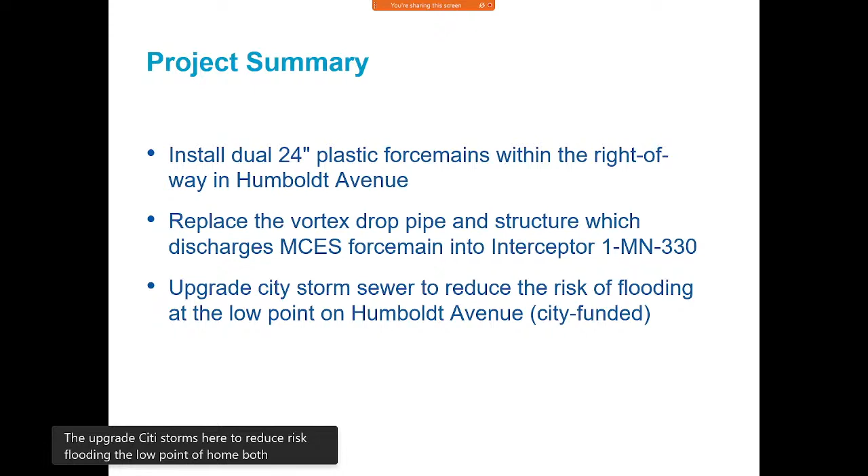The communication activities to date - we've done a fairly extensive communication plan. We had a virtual open house back on August 25th. We've met with major events in the area, the Uptown Art Fair and Uptown Farmers Market, which use the area where we're proposing to do some of the work. We've coordinated the work with them and they're on board with our plan. We met with the Minneapolis traffic department and the Hennepin County Regional Rail Authority for the Midtown Greenway crossings. We've got plans to accommodate the bike trail path and traffic without having to detour them.

We've got an extensive traffic control plan that has been reviewed by the traffic department. We've also updated Councilmember Goodman in Minneapolis on two occasions, and we plan to continue updating her fairly regularly. During the construction phase, we have a website, hotline, and project email that are all active currently. We've got what's called a Gov Delivery sign-up, where residents, city officials, or council members here at the council can periodically sign up to get updates on the project.

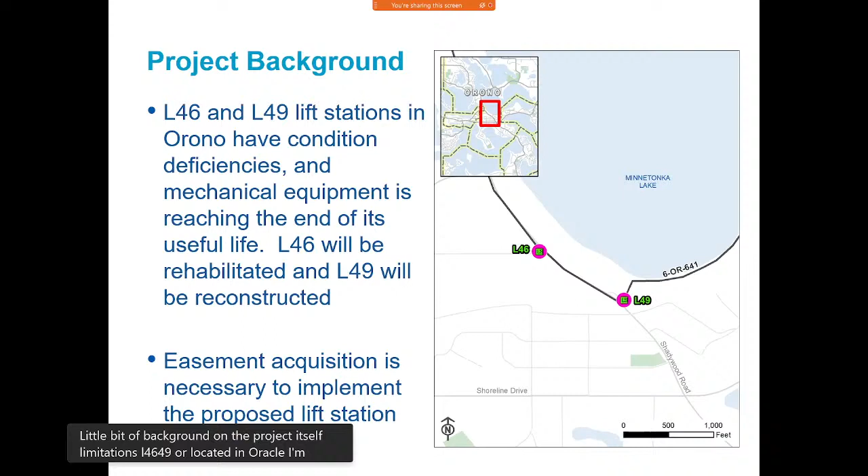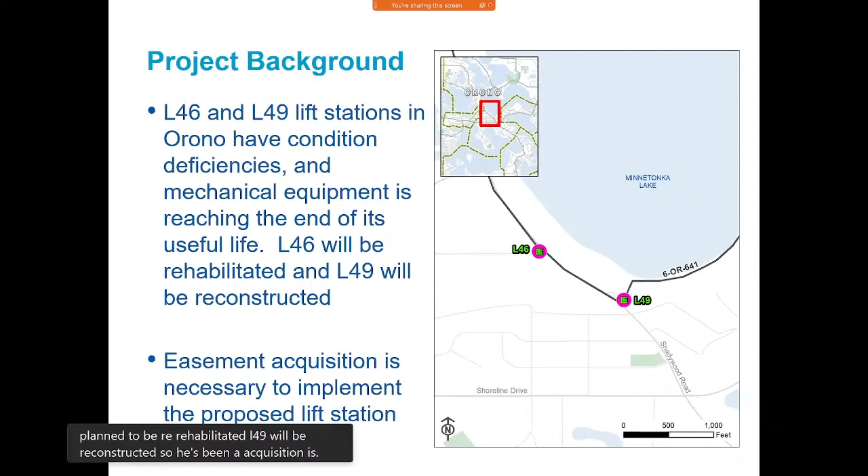A little background on the project. Lift stations L46 and L49 are located in Orono, on the south shore of Crystal Bay on Lake Minnetonka. These facilities have been identified as having condition deficiencies; the mechanical equipment is reaching the end of its useful life. L46 is planned to be rehabilitated, L49 will be reconstructed, so easement acquisition is necessary to implement the proposed lift station improvements for this project.

Next slide please. The work will require a temporary easement for construction on one parcel near L49. We'll also need site improvements near L46 that will require expansion of an existing permanent easement. Site improvements at L46 will include a driveway to accommodate maintenance vehicles, reducing the use of on-street parking which reduces visibility at an intersection with difficult sight lines. That's the main reason for the additional permanent easement needed for the area.

Next slide please. With that, our proposed action is that the Metropolitan Council adopts Resolution 19, authorizing the acquisition and condemnation of real property for the L46 and L49 lift station improvements, MCES project number 802831. Next slide please. And with that, I can stand for questions.

Any questions for Mr. Woodine? Pretty straightforward, and I think you're up on the next one too, but let's vote on this one. Roll call, or is there a motion first? A motion, Wolf moves approval. And a second? Vento seconds.

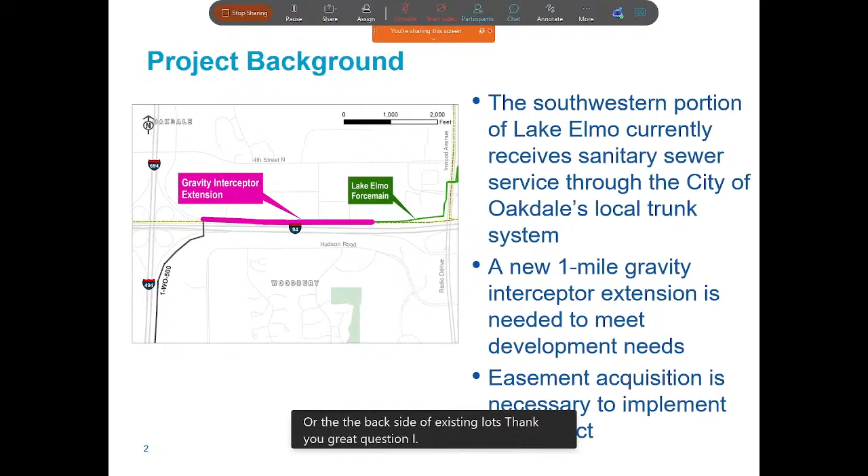Okay, we have a motion and a second. A roll call, please. If I could have that repeated, who motioned and seconded? Good question. It was Councilmember Vento that made the motion. I'm not sure we actually did get a second. Wolf was the second. Oh, Wolf. There we go. Yeah, excellent, Councilmember Wolf. Okay.

Roll call, please. Fredson? Aye. Sterner? Aye. Vento? Aye. Wolf? Aye. Zarin? Aye. And Lindstrom? Aye. Thank you.

All right. Thank you, everybody. A few items, just as information items. First two dealing with COVID, starting with an important first one about communication. Ms. McKinley.

Hi, everybody. This is Karen Neese. I'm going to introduce Deb in a second here, but good afternoon, Mr. Chair and council members. Good afternoon. Welcome. Thank you. Karen Neese, I'm Director of Administration and Communications for Environmental Services.

But I want to ask you to go back about a year. Let's go back to March of 2020, which seems so long ago. I just read an article that said it's the longest year, and it feels like that. On March 6th, that was the first case of COVID-19 confirmed in Minnesota.

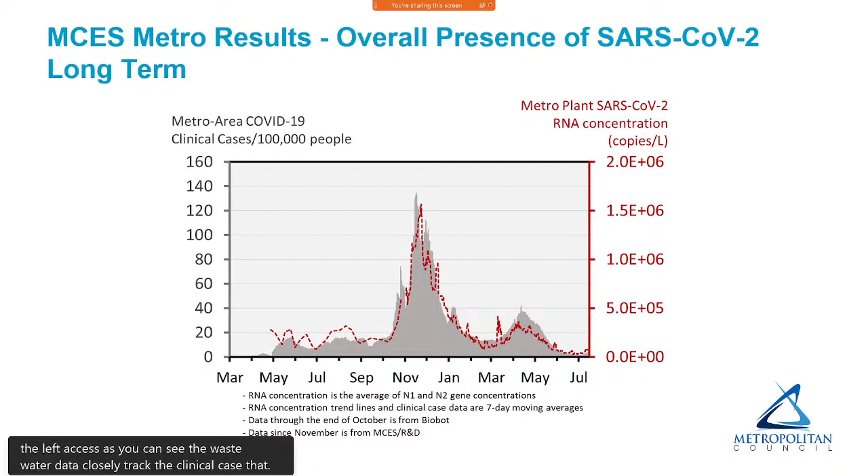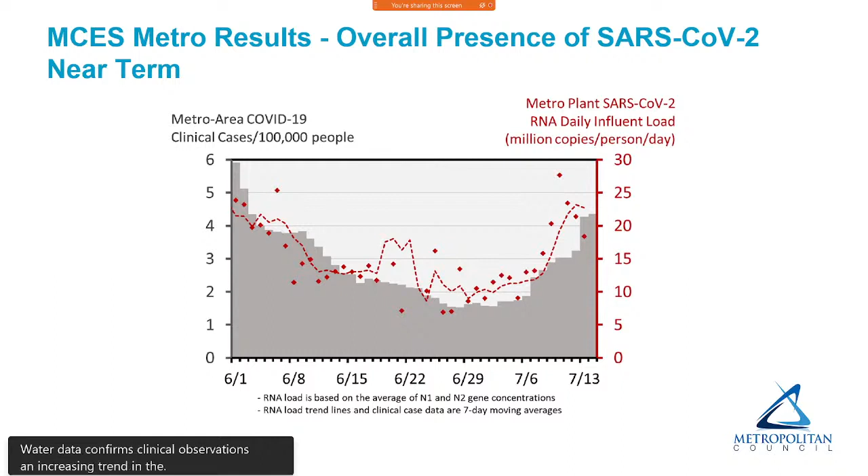Next slide, please. Currently, we are experiencing a surge in new clinical cases driven largely by the highly contagious Delta variant. This plot shows recent data for both the metro plant influent load and new clinical cases starting in June and running through July 14. As you can see, the wastewater data confirms clinical observations of an increasing trend in the presence of the virus in the metro plant service area.

Next slide, please. As George indicated earlier, a major new development since we spoke with you last is our initiation of variant monitoring in metro plant influent. Our targeted assay work has produced results demonstrating how a surge in the prevalence of the Alpha variant drove the higher viral loads we saw in metro plant influent back in April and May. The blue area in this plot represents the total SARS-CoV-2 load entering the plant over time, and the cream-colored area shows the Alpha variant load. You can see that the Alpha load went from 0 back in January.

Alpha accounted for up to 85% of the total load during and through the surge from March to June. We didn't have data in time to get it into this presentation, but I can report that the Alpha variant has now been almost wholly supplanted by the Delta variant, which now represents nearly 100% of the SARS-CoV-2 viral RNA we are seeing in metro influent.

The pandemic is not over, and we expect other new variants of concern will appear in our community in the future. Going forward, we will be in close communication with Department of Health staff on the selection of which variants to include in our targeted assay variant monitoring program, ensuring we are getting the most relevant data for public health decision making. Next slide, please.

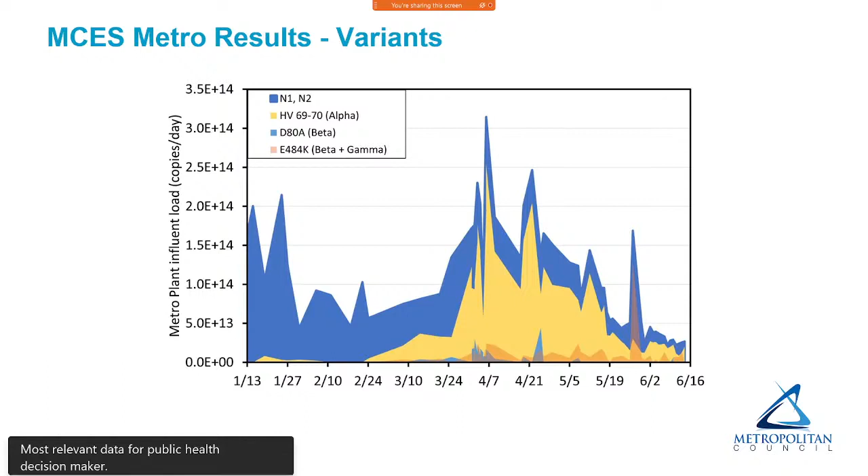Our future efforts will remain focused on monitoring the load of viral RNA and the prevalence of variants of concern in metro plant influent wastewater. We will coordinate closely with Department of Health staff on the variants we target and provide them with weekly updates of our results. Within the next month, we will complete our initial evaluation of the sequence capture technique and hope to begin producing additional sequence-specific information soon thereafter. We will continue our participation in state and national projects, providing pandemic surveillance and developing the potential of wastewater-based epidemiology for the protection of human health.

That completes our update. Thank you again for this opportunity and for your time. If there are any questions, we will be happy to address them.

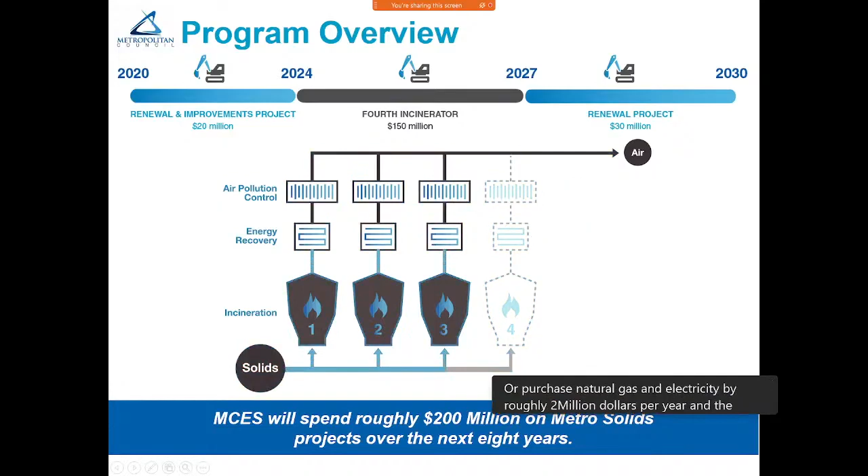Thanks, Janine. The 4th incinerator will be constructed upon the completion of the current smaller renewal project. MCES plans to construct a 4th parallel incineration train similar to our existing system with comparable energy recovery and air pollution control systems. The energy recovery system reduces our purchased natural gas and electricity by roughly $2 million per year, and the incineration process reduces 850 tons of wastewater solids down to 40 tons of inert ash.

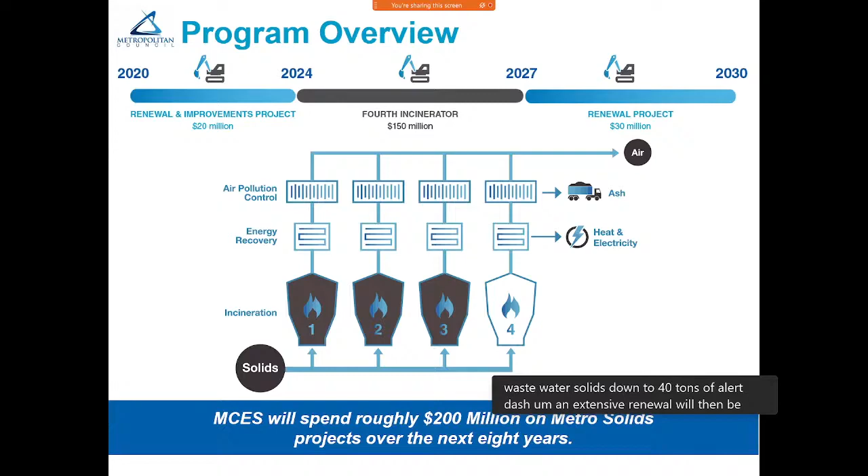An extensive renewal will then be completed on the existing 3 incinerators from 2027 to 2029. In the next 8 years, MCES will spend roughly $200 million on Metro Plant Solids projects. Next slide.

The planning for the project was completed when the council approved the facility plan in October of 2018. The project is currently in preliminary design, including permitting and environmental review.

The Metro Plant's air permit will be amended and, as Janine mentioned, a voluntary EAW will be completed. Both of these processes will be managed by the Minnesota Pollution Control Agency. As Janine mentioned, the construction of the fourth incinerator will occur from 2024 through 2026, and the delivery will be a fixed price design build.

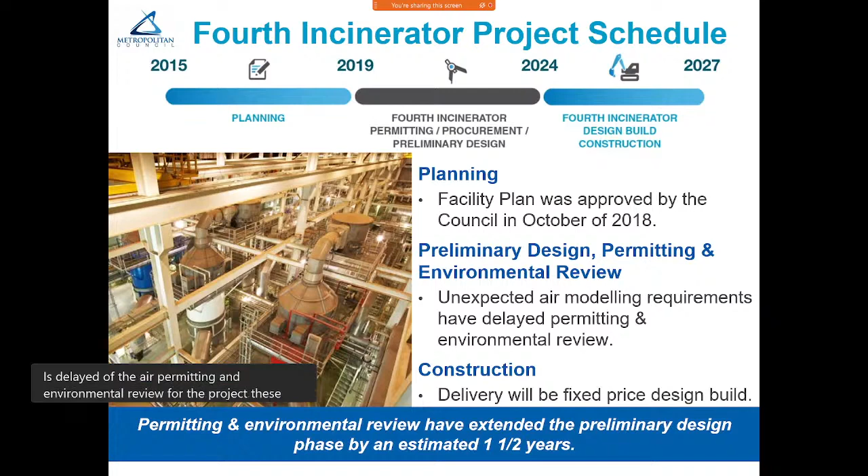The project has run into some unexpected computer modeling requirements due to where the metro plant is located, which has delayed the air permitting and environmental review for the project. These delays have extended the preliminary design phase by roughly 1.5 years from what was originally planned.

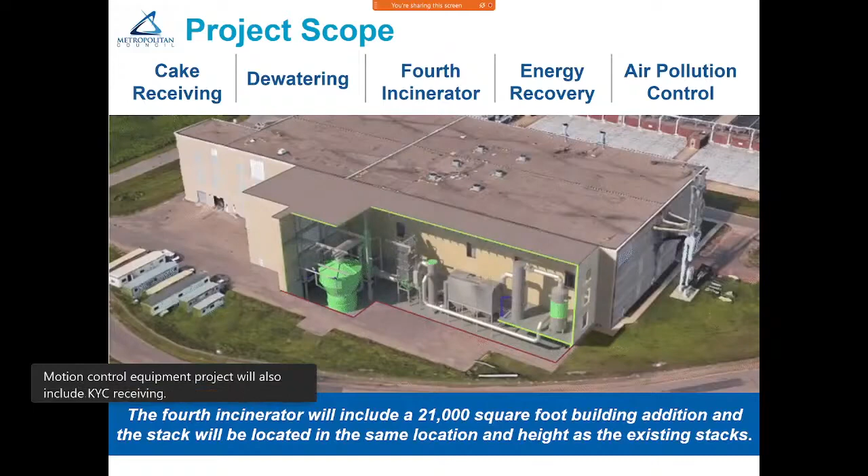The project will also include additional dewatering facilities, the fourth incinerator, energy recovery including a new steam turbine generator, and air pollution control equipment. The project will also include cake receiving facilities so that MCES can accept dewatered solids from other MCES wastewater treatment plants on an emergency backup basis.

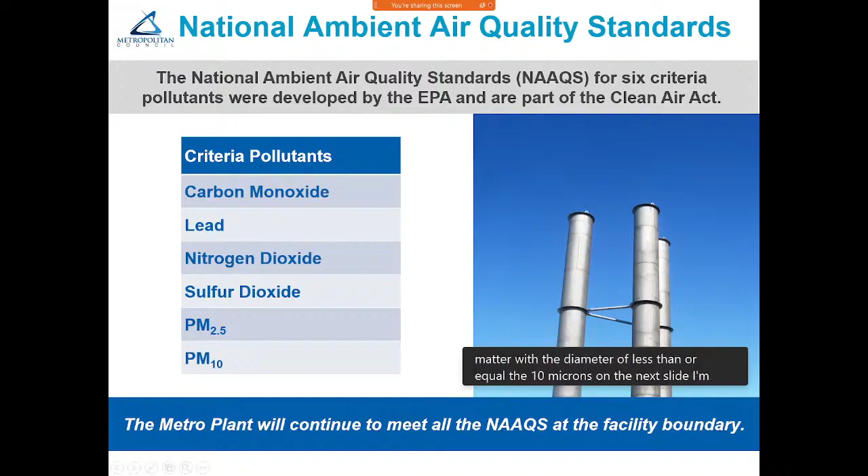PM2.5 is small airborne particulate matter, or material with a diameter less than 2.5 microns. PM10 is particulate matter with a diameter less than or equal to 10 microns. On the next slide, I'm going to talk a little bit more about the pollutant PM10.

The graphic on the left side of the slide shows a gradation of micron particle sizes from the smallest, a smoke particle at 1/2 micron, to the largest, a coffee ground at 400 microns. A PM10 particle is about the size of a particle of pollen. Breathing in large concentrations of PM10 can damage your lungs, and that's why there's an air quality standard in place for PM10.

In 1994, the blue area shown in the map on the right, surrounding the metro plant and other industries, was above the national ambient air quality standards for PM10. The area includes Childs Road and Red Rock Road. When an area exceeds a national ambient air quality standard for a particular pollutant, the MPCA identifies the area as non-attainment for that pollutant.

In response to non-attainment for PM10, the MPCA developed a state implementation plan, or SIP, which is a collection of regulations and requirements for the area to bring it back below the national ambient air quality standard. Emissions reductions successfully brought this area back into attainment in 2002, and MCES played a role in improving the air quality in the area by replacing multiple hearth incinerators at the Metro plant with fluid bed incinerators in 2005.

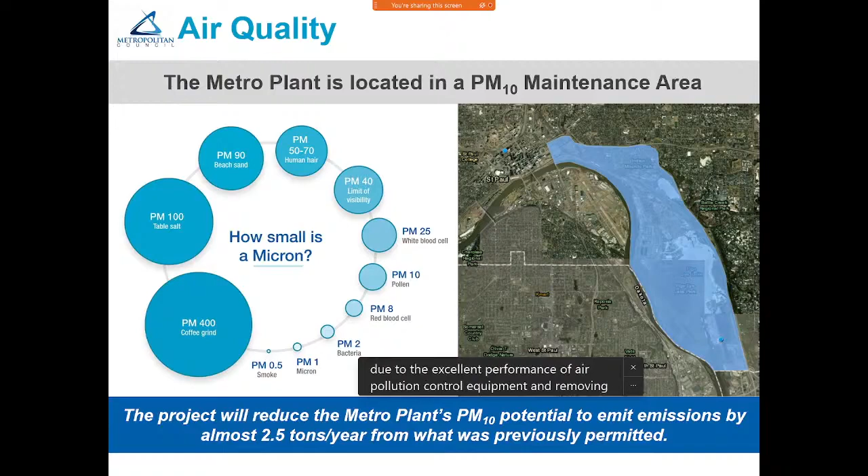That's because we didn't construct previously planned facilities for land application of sludge, and we were able to accept a low PM10 limit due to the excellent performance of air pollution control equipment in removing particulates from incinerator emissions.

The existing Metro Plant incinerators have an exceptional track record of environmental compliance, and we're very proud of their performance. The incinerators have performed so well that the emissions data from the Metro plant were used by the EPA in establishing new, more stringent standards for incinerators in 2010.

In 2010, the EPA set new emission standards for existing sewage sludge incinerators constructed before 2010, and even lower standards for new sludge incinerators constructed after 2010. These standards are based on treatment technology, and they're separate from the national ambient air quality standards I just presented. The existing incinerators at the Metro plant were constructed in 2005, so the standards for existing incinerators apply.

The graph here compares actual emissions data for the Metro plant incinerators, the dark blue columns, to the standards for new sewage sludge incinerators.

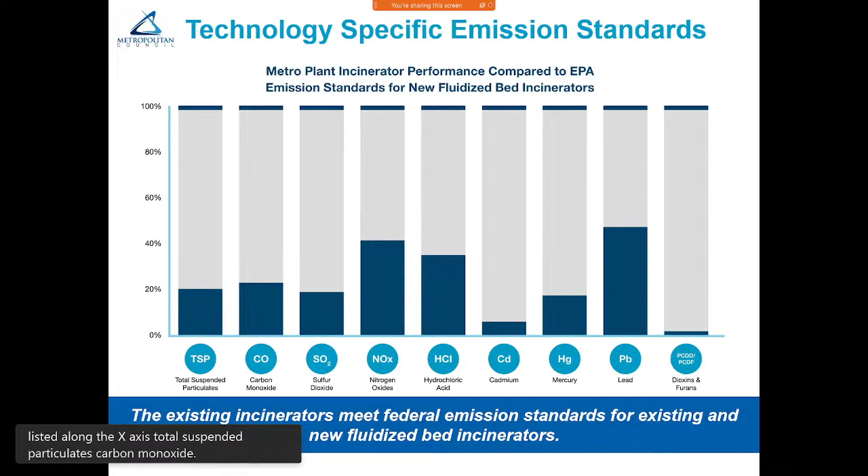These are the new incinerators, not the existing ones. The pollutants of concern are listed along the x-axis: total suspended particulates, carbon monoxide, sulfur dioxide, etc. The standard or limit for each pollutant is represented as 100%, shown by the dark blue dashes at the top of the chart. You'll see that for each pollutant, the Metro plant incinerator emission is just a fraction of the standard for new incinerators. These results give us confidence that the fourth incinerator will be capable of meeting the lower technology-based standards established for new sewage sludge incinerators.

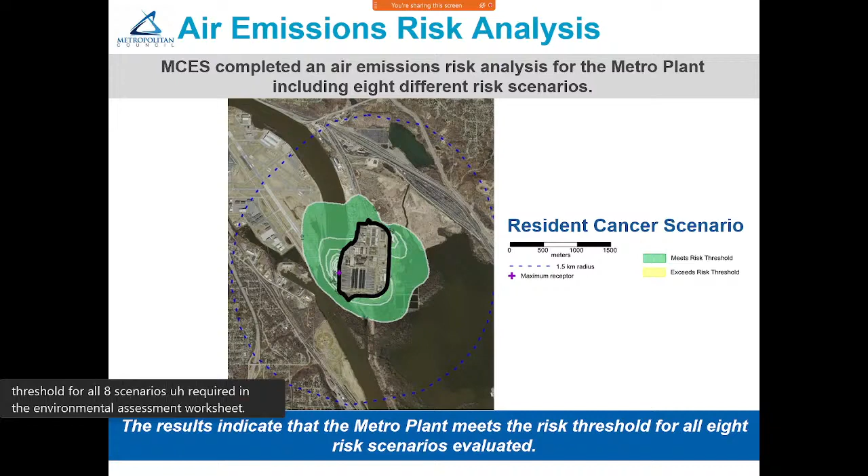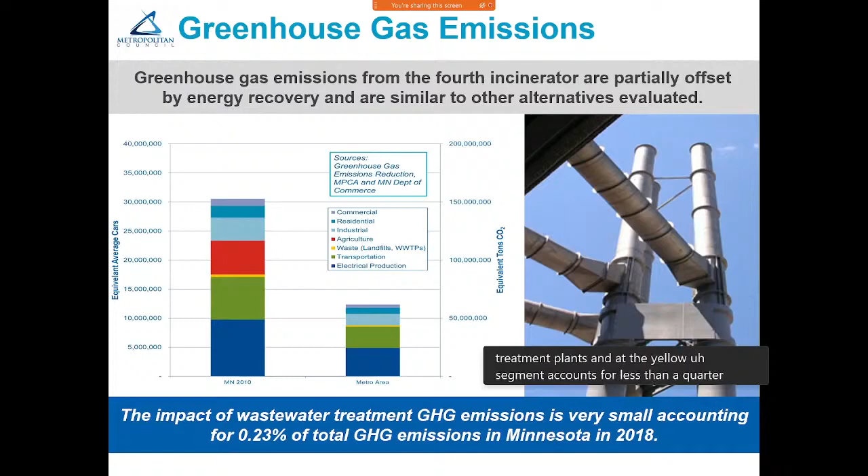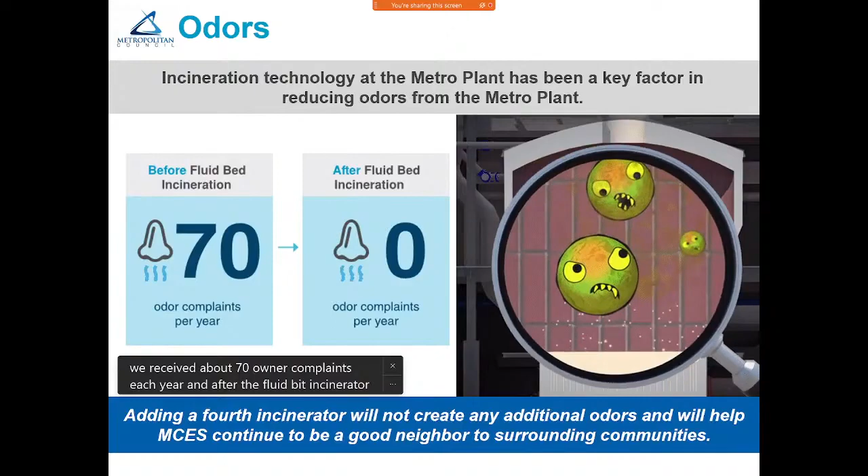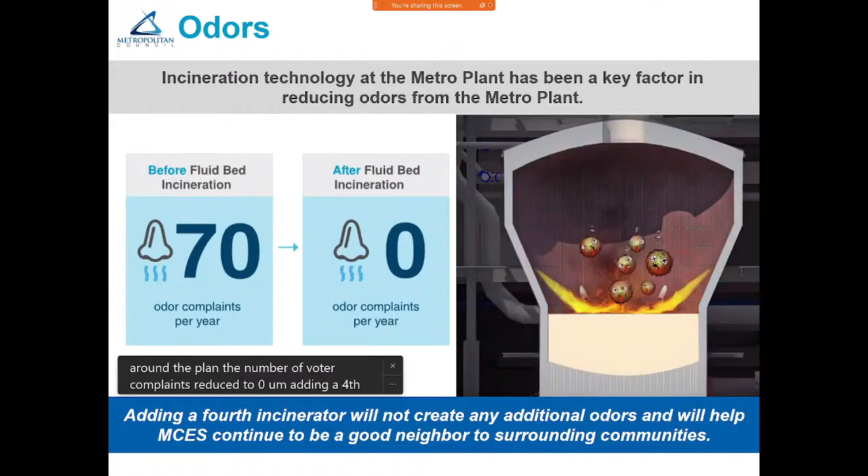Incineration technology at the Metro plant has been a key factor in reducing odors from the plant. Before the fluid bed incinerators were installed in 2005, we received about 70 odor complaints each year. After the fluid bed incinerators were constructed, along with other odor control improvements around the plant, the number of odor complaints reduced to zero. Adding a fourth incinerator will not create any additional odors and will help us continue to be a good neighbor to surrounding communities.

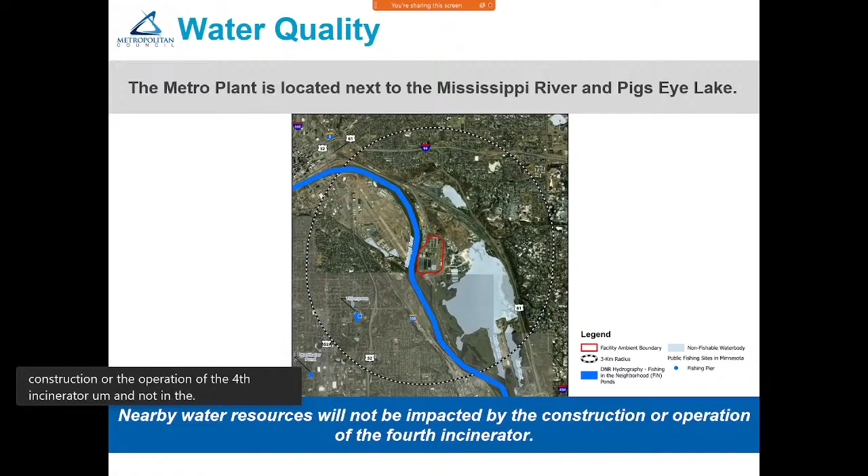At this time, I'll turn it over to Jody Jacoby to present the selected design build procurement approach.

Thank you, Renee. Good afternoon, Chair Lindstrom and committee members. My name is Jody Jacoby, and I'm the Director of the Procurement Department. I'm really excited to be here this afternoon to talk to you about the procurement approach and some of the considerations for this really important project. As this is an important project, there's been a small group of stakeholders in Procurement, the Office of Equal Opportunity, the Environmental Services Engineering Unit, and also the Office of General Counsel working closely together to address some of the unique challenges with the design build procurement.

In working with the owner's agent, we learned that there's a limited number of incinerator vendors that do this specialized work. Really, there's only 2 or 3 that we believe may be qualified for these large wastewater solids incinerator projects like this. And additionally, we're not sure of their interest or their availability.

The incinerator vendor will design and furnish the incinerator and the air pollution control train, and additionally be responsible for up to 30% of the design build contract. Setting the structure to not have the incinerator vendor choose the design builder. Rather, the council wants to retain independent selection for the best design build team.